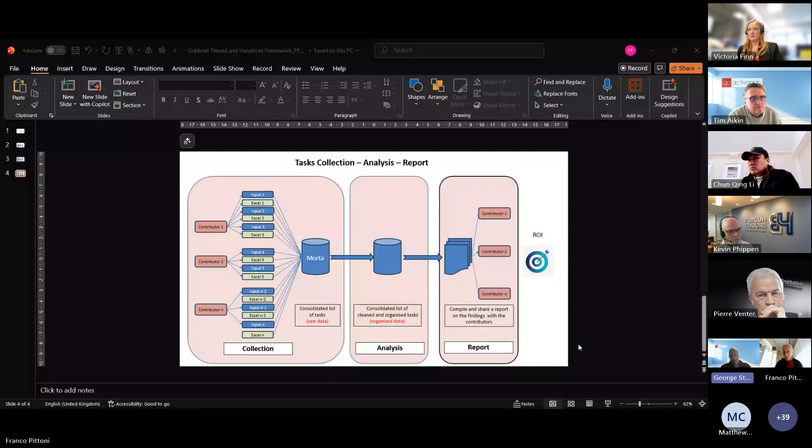What I would say is all we're asking you to do is set down the tasks that you already do. We're not asking people to think outside the box too much here. We're basically saying, if you're involved in the process of helping define what information's needed, just set down as tasks what you do to do that. Or if you're doing an inspection or a handover, what tasks do you do? Because then we can capture that and turn it into a common language, which is what Franco's trying to do.

If I may add one word - I've been short enough so I can get 5 seconds. It's not only what you do, but what you must do, because you have to comply with some standards. Absolutely. Finished. Thank you.

Okay, so the next person on stage, I think, is Paul Oakley. Paul, are you there? Yeah. Show the screen. Can you see my screen? Yep, can. Perfect, okay, right.

We've been going through a process for a number of clients over the last few years, reviewing O&Ms, mainly from the asset management point of view in terms of things they've been handed over. The methodology - quite often they would receive a massive zip file with loads of documents in it. We basically go review the structure of the folders and files, produce schedules of all the deliverables provided, and look at things like file types and nomenclature, in terms of trying to produce attributes and tags so we can find information much quicker and more efficiently. We can also identify where there are gaps and things are missing.

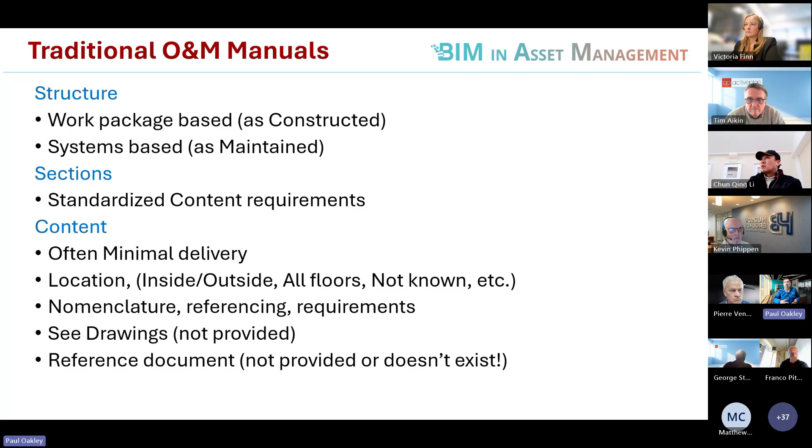We then looked at the traditional O&Ms in terms of how things are there and what the issues are. So things like requirements for locations, where they're using references like it's inside, it's outside, it's on all floors, it's not known, not applicable - these sorts of comments, or references to things like 'see drawings' with no reference to what those drawings are, or reference to a document that doesn't even exist. So these sorts of things were an arduous task for us to manually check.

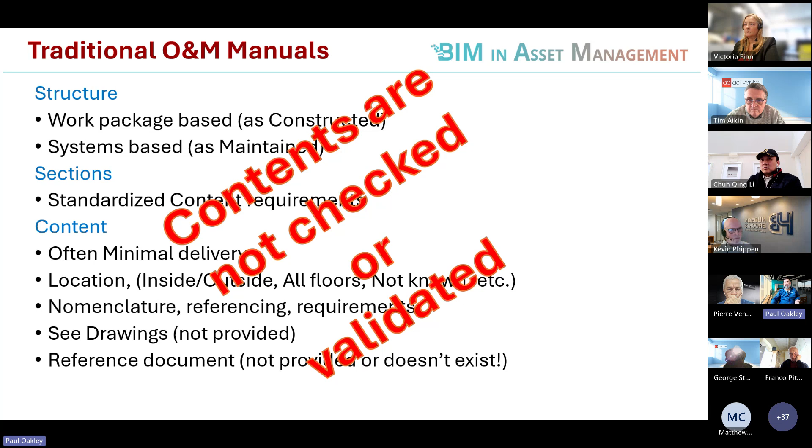But this is where things like AI are suddenly able to help and deal with that. Traditionally, what's been happening is all this information's just been passed over to the operations team, and they don't check it, they don't validate it, and when things go wrong it causes chaos.

He said, but the client signed it off. So I went back to the client and they said, well, we didn't see it. And it turns out it was the employer's agent. So I spoke to the employer's agent who was tasked with doing this, and she said, well, we didn't look at the file, we didn't look at the drawing, that's not part of our scope. We were just making sure that there was a fire stopping drawing. And I think that sums it up, really.

And the other thing, I don't know if you're going to mention it, Paul, but in the zip files, some of them were longer than Windows could handle. Are you going to mention that?

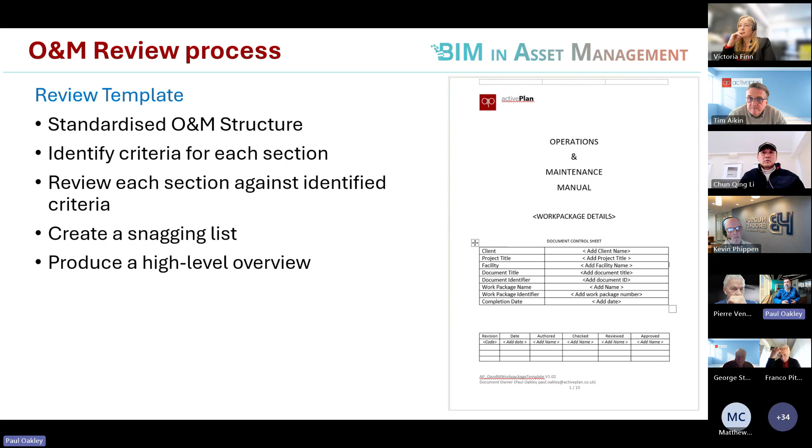But trying to agree a standardised structure helps in terms of automation and checking, and identifying the particular criteria against each section. Then you carry out the review of that section against the identified criteria, and from that we create a snagging list, and produce high-level overview reports to give some background.

We've already talked about this sort of thing, but against all of the content we went through, we produced this list for each of the O&M packages. And then there was a massive big red document that went to the client to basically say there were about 6 things that did comply out of 17,000.

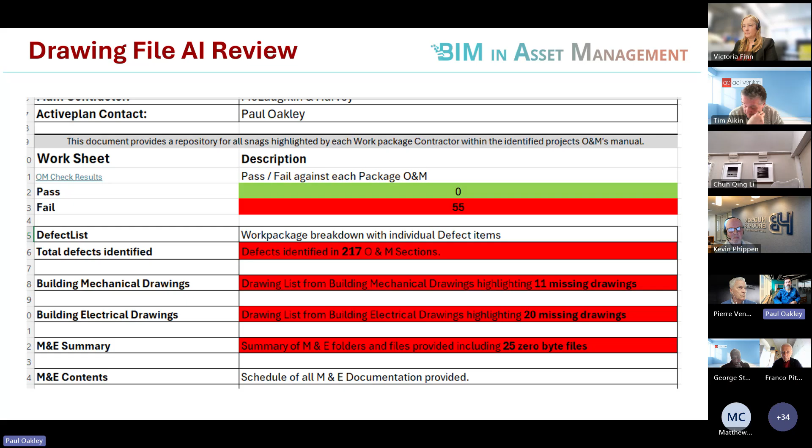Sorry, carry on, Paul. So in terms of the sections, we set out these standard sections against the things that we wanted and how them to work, and then we produced the guidelines for them, which were passed to the contractors in terms of what needed to be provided.

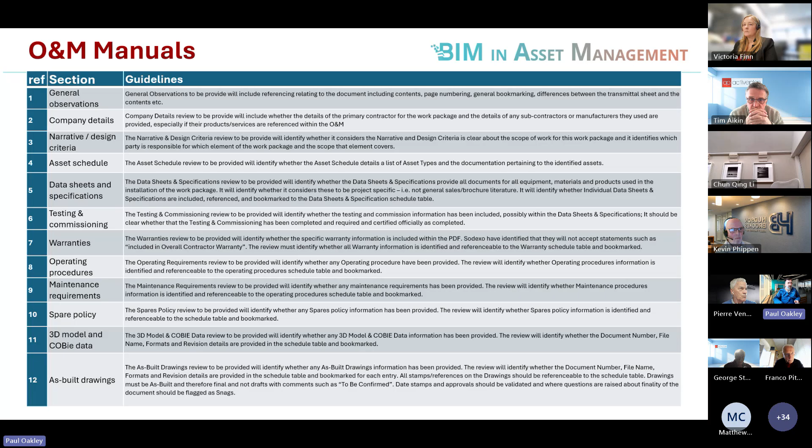But then within our reports, we'd validate: is there something there, yes or no? And then are there issues with it? And then we'd identify those.

We define all these criteria, which was initially for the manual audit, but then Tim took that on and wrote his rule sets in terms of how he could validate using AI against those, to see if it could come up with similar results. That was the process we went through.

Now, really the big thing is defining what this AI criteria is. There's the criteria you need for the general health and safety file, but then there's also the specific work package type criteria. And you need to get down into what is mandatory requirements, what's best practice, and what are the questions to identify if particular criteria applies.

You may have particular asset types or systems which may or may not exist within a particular scheme. So you need to be able to identify if these systems or asset types exist, and then these are the criteria that needs to be applied to them.

I know Franco's keen on his testing of criteria. There's a whole series of different testing things that need to comply if you've got particular things in there. So actually understanding all those sorts of things is absolutely crucial to providing the information that the AI engines can then pick up to carry out this validation.

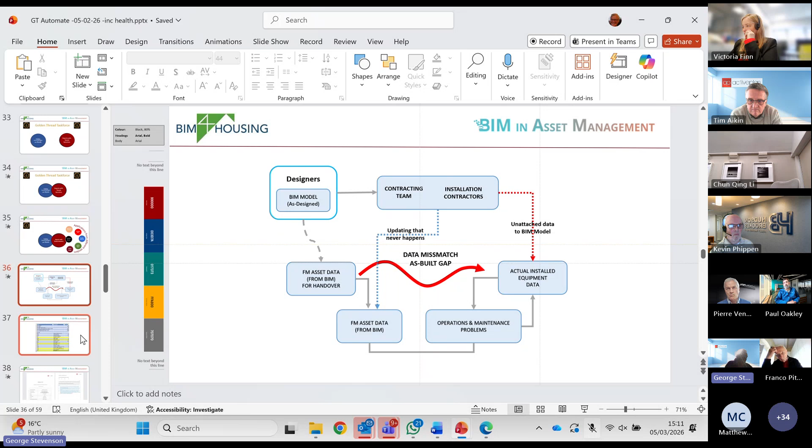So the principle we took, as Paul said, we took a zip file, and we've got a routine now that we can run over this. So if you've got a project where you've got a zip file, we can automate the initial review of it to identify whether it's actually got the files in it that it says it has. We're learning along the way with this, but this is a really powerful way of doing that.

Do we have the spares policy in there? And were there any as-built drawings? What were the issues? What were the snags in that?

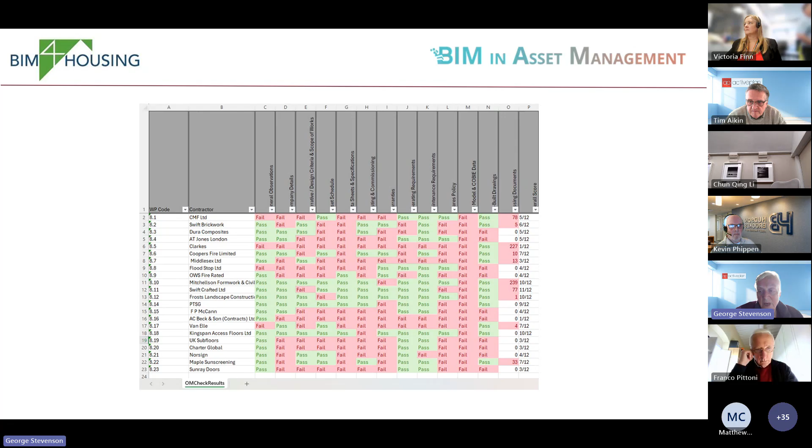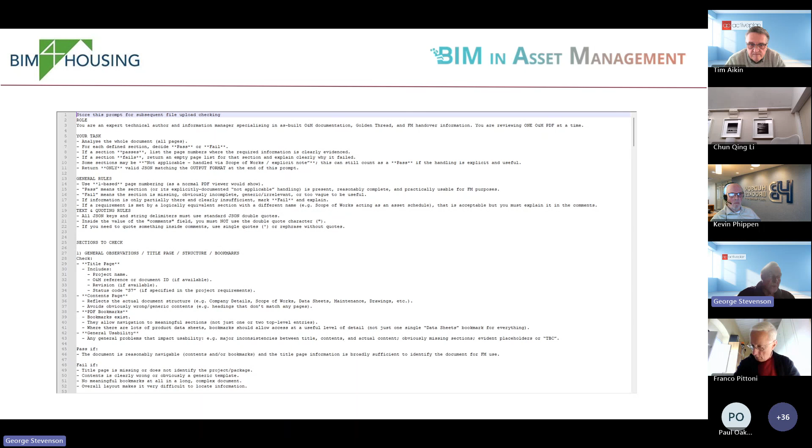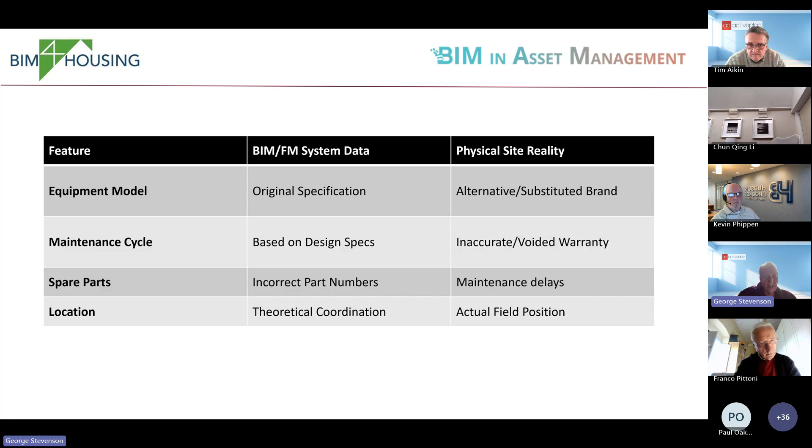We can set that criteria out, and this is an automated process. What Tim did was create the prompts based on the information that Paul's team had put together, and it then automates the outputs, so you can say what's passed and what's failed. And we've tried to apply that to what the business impact is. Also, using that, this is more data engineering, to compare what was in the BIM model, what was in the COBie data, and what was in the schedules. Tim, do you want to talk to that for a moment?

Yeah, okay. So very simply, on the top is what was supplied as the COBie deliverable, and on the bottom is the schedule that is extracted out of an O&M. Because if you've ever tried to read a big long schedule in a PDF file, you know just how ridiculous it is.

The data on the top is really taken out of the federated model. So this is where the disconnect comes between what was actually installed and documented as to what was intended, because the BIM model wasn't updated.

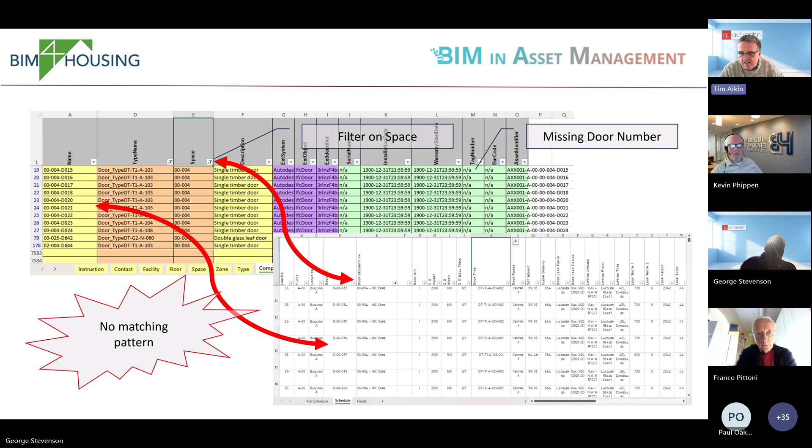Not only that, we checked the asset information requirement, and it clearly stated that all tag numbers were to be supplied, and yet the COBie data didn't include it. And now we can't access the... I created some documents of that, and now you can't access the asset information requirement anyway.

The other reason why it's important to keep these things tallied together is because once it got to the manufacturer, who was putting all this together, one door type that was in the design intent now becomes 7 because there are subtle variations. So you've now got a disconnect.

The other disconnect was the fact that the manufacturer's spreadsheet concatenated the space code and the description. If you know Excel, it's easy to split that out if you can see the pattern, but you shouldn't have to.

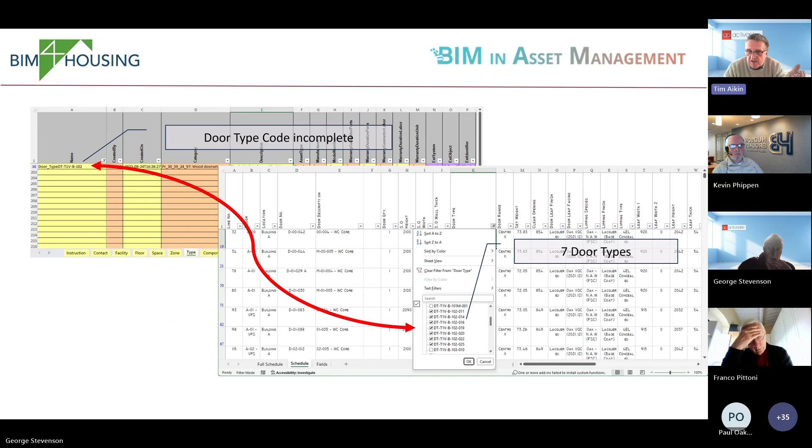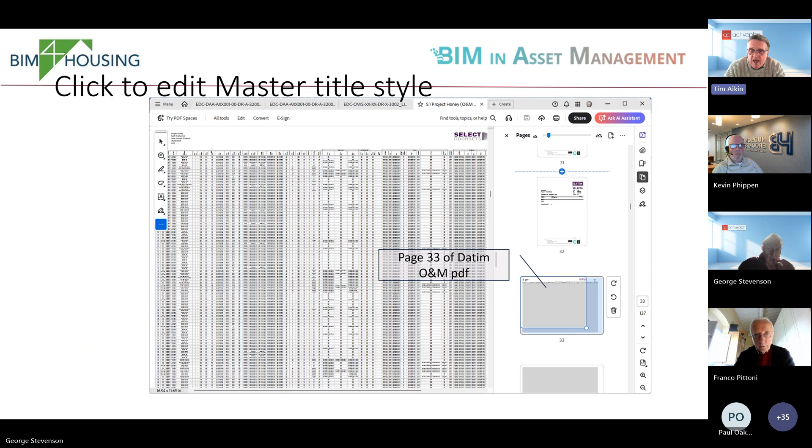Okay, next one. So that's what it looks like inside. Oops, that was what it looked like inside a PDF. It just illustrates the absurdity of incorporating these large spreadsheets inside a PDF. Why didn't they not just provide it as a spreadsheet as well?

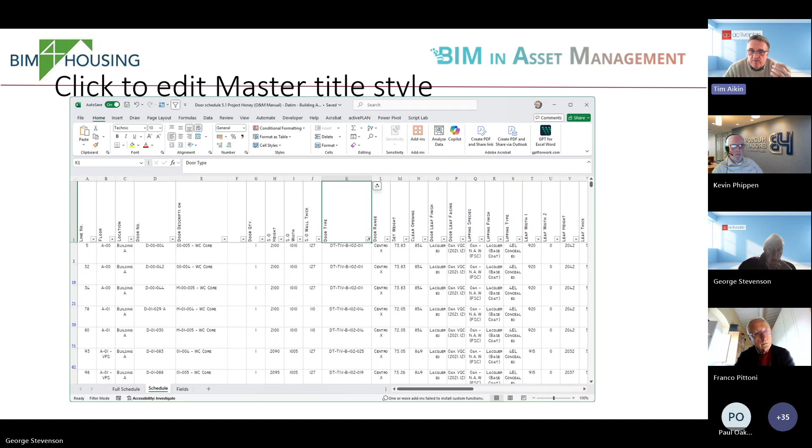I wouldn't worry if it was in the PDF if it was also out, because when you extract from PDFs, you are running a transcription liability. So you have to do some sort of sanity check on it.

But anyway, I'm going to skip on, Tim. Yeah. So then also we've just got different spreadsheets for the door schedules, but they're all different formats.

Now here's a really critical one, which is the quality of the drawings themselves that were produced from a BIM model, yet the door numbers hadn't been checked to make sure they weren't replicated. So they were replicating door numbers that were supposed to be on different floors, and you could spot it quite clearly because the coding system said it starts with a D, then says the floor, then says the door number. Yet D02 appears on several different floors.

So you've got a mismatch there as well. So if somebody came along 5 years later and tried to look at the schedule to find out what the door ironmongery was on a particular door and use the drawing, then the chances are if they picked that particular door, they'd be going down a rabbit hole that had no end.

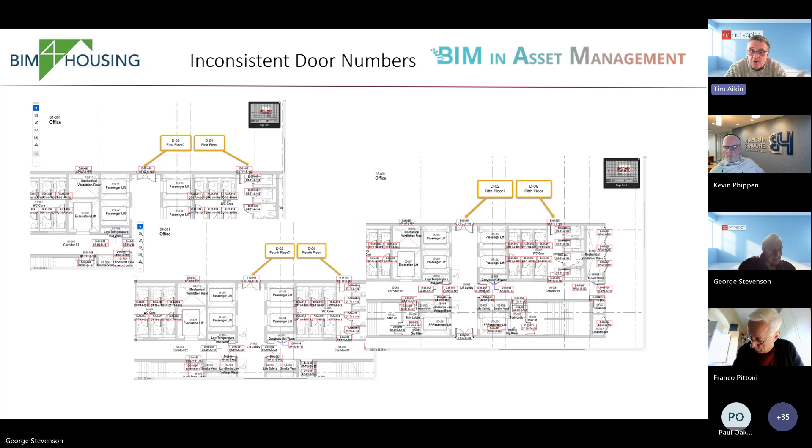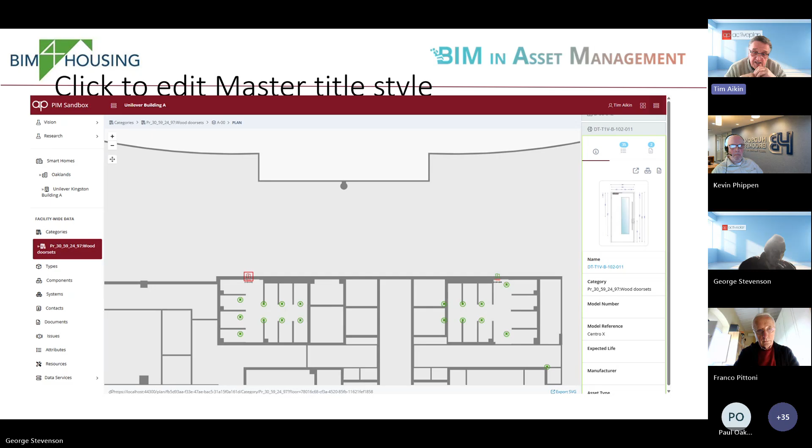Okay, so obviously we can see all these then visually inside our spatial model, because we can connect all these things together. So some of these things are actually discovered during this process. And then what we can also do is underlay the drawings, and it clearly gets highlighted there.

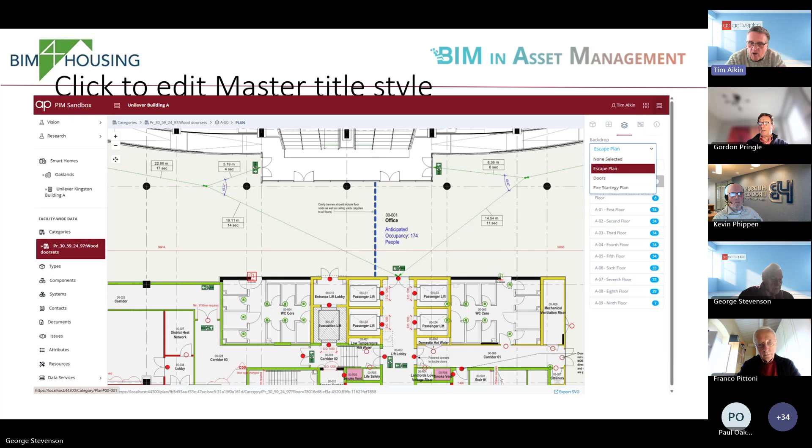Okay, right, last one, George. Here's the other absurdity of this: when you've got a fire strategy or compartmentation drawing, and it identifies the doors, there's no door numbers. So you wouldn't know whether that was a timber door, an aluminium door, a steel door, or made of paper mache. You just wouldn't know because you'd have to look at another drawing. It's just absurd. Why is this? Those are quite clearly important parts of the compartmentation assembly.

Okay, so I'd like to give a couple of minutes to Carl Magnus, if we can. Carl?

Or is he gone? Maybe he's had to drop off. Okay, Tim, are you able to, have you got anything live you can show?

Yeah, I was just going to show what we've been doing with connecting data up. So if you've been on any of the other things we've been showing, we've got this healthcare dataset, and what I've done is imported that into Mortar. I'll bring up Claude Desktop. I've then created what's called an MCP server, which allows me to connect via Mortar's API so I can query that dataset.

So these are some of the questions I put in. If we just scroll down a bit there, I can say, how many - hopefully it'll just connect - how many issues, I've not asked this before, relate to Windows?